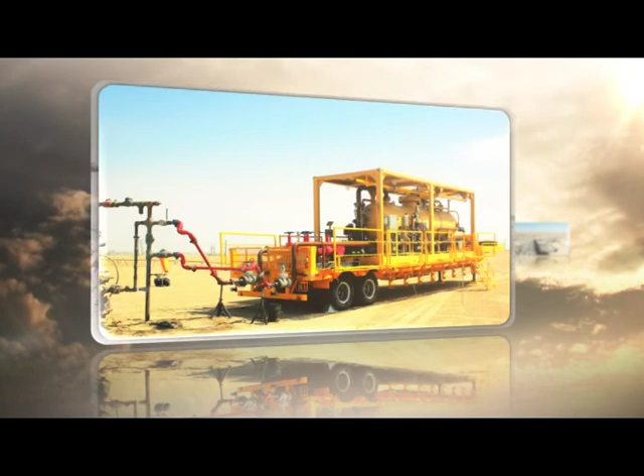HBP, the oil equipment brand from China.

The historic pictures recorded the innovative development of HBP in the past 10 years.

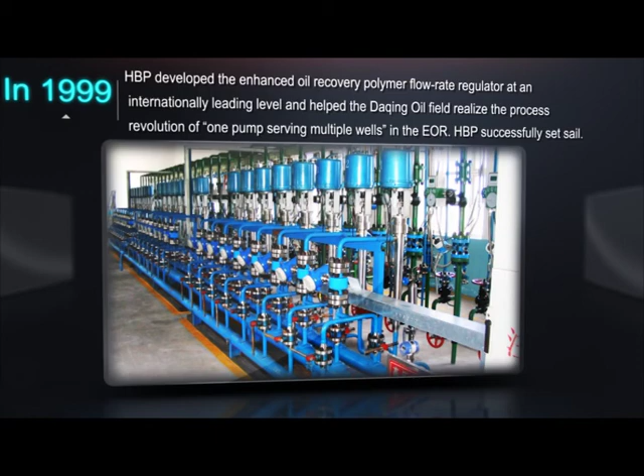In 1999, HBP developed the Enhanced Oil Recovery Polymer Flow Rate Regulator at an international leading level and helped the Daqing oil field realize the process revolution of one pump serving multiple wells in the EOR. HBP successfully set sail.

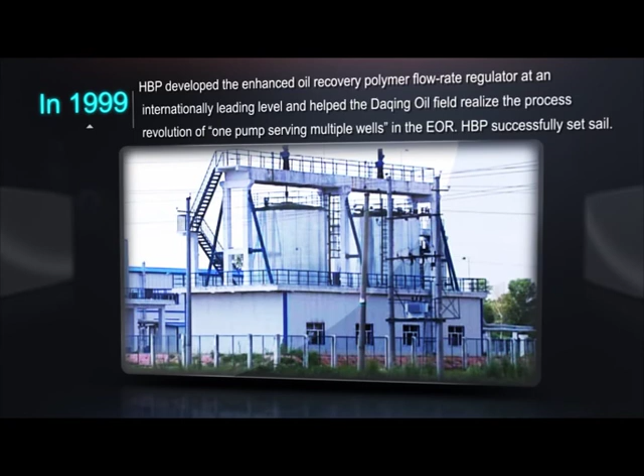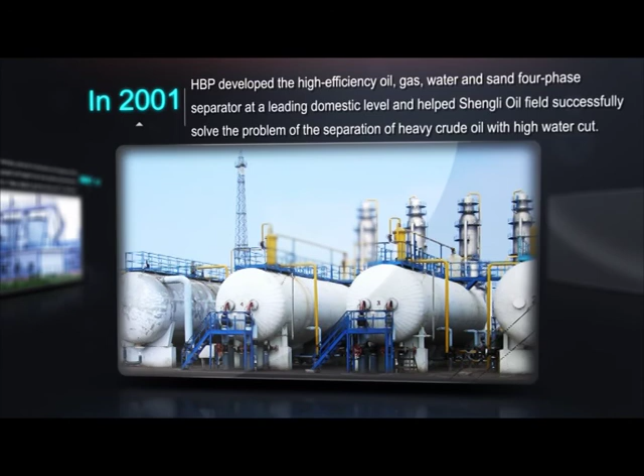In 2001, HBP developed the high-efficiency oil, gas, water and sand four-phase separator at a leading domestic level and helped Shengli oil fields successfully solve the problem of the separation of heavy crude oil with high water cut.

In 2003, the HBP oil and gas processing equipment successfully entered the offshore oil market, providing complete sets of equipment for the offshore platforms, FPSO, and the onshore terminals. The company became the core supplier of Chinese offshore oil equipment.

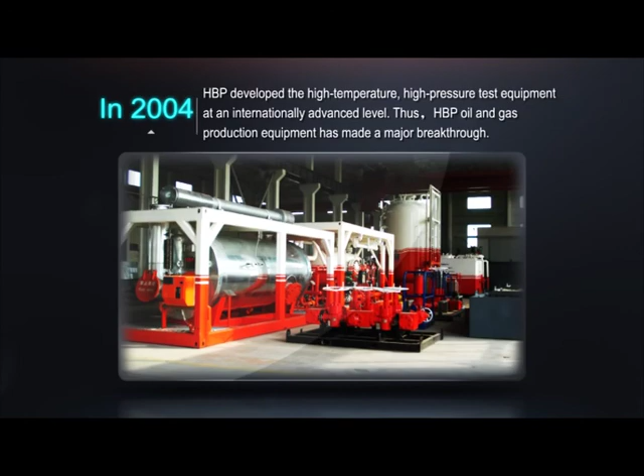In 2004, HBP developed the high-temperature, high-pressure test equipment at an internationally advanced level. Thus, HBP oil and gas production equipment had made a major breakthrough.

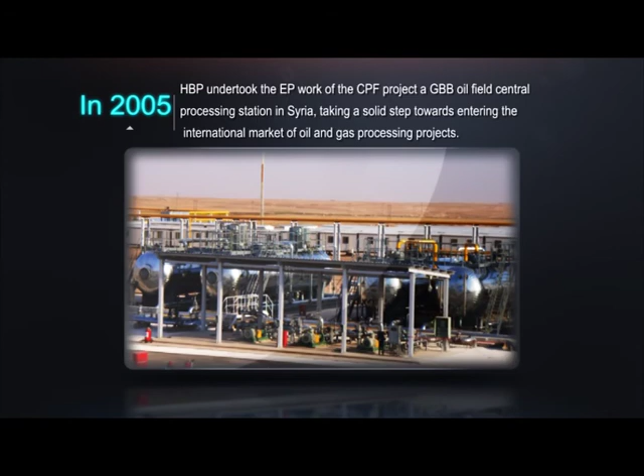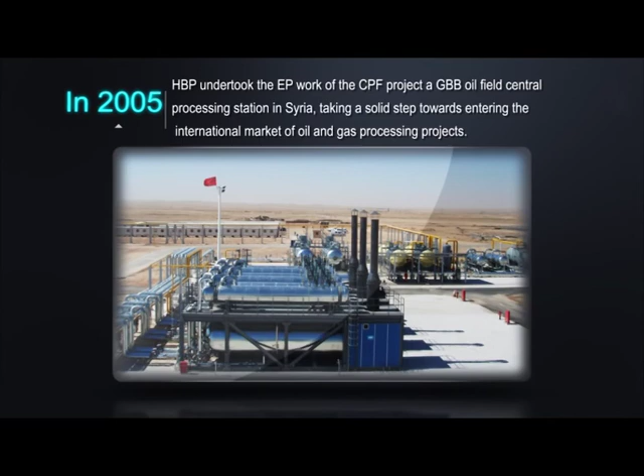In 2005, HBP undertook the EP work of the CPF project at GBB Oilfield Central Processing Station in Syria, taking a solid step towards entering the international market of oil and gas processing projects.

In 2006, HBP undertook the 4-gas lift gas processing project in Janajol Oilfield, Kazakhstan, completing industrial chain extension of HBP oil and gas processing technology.

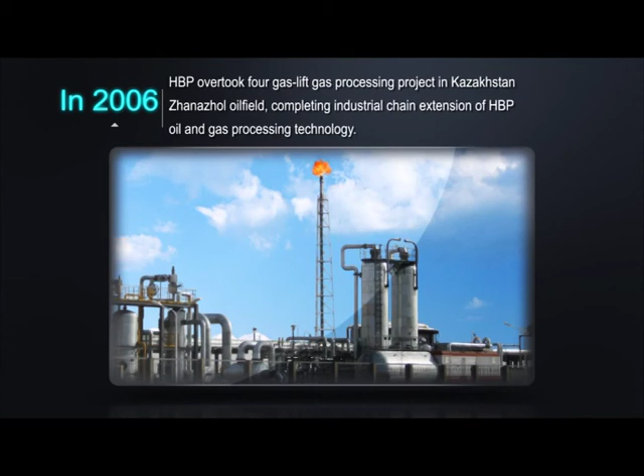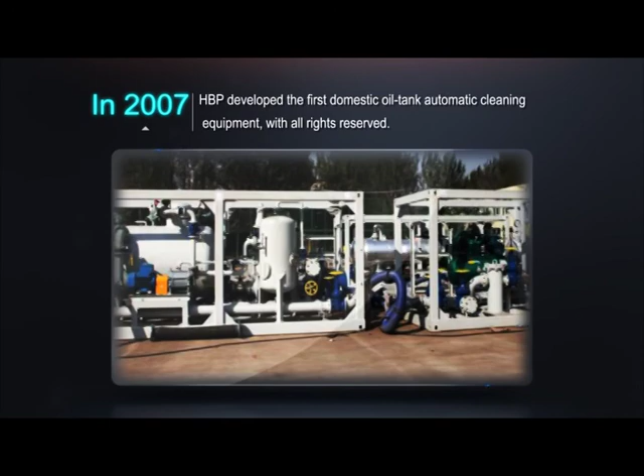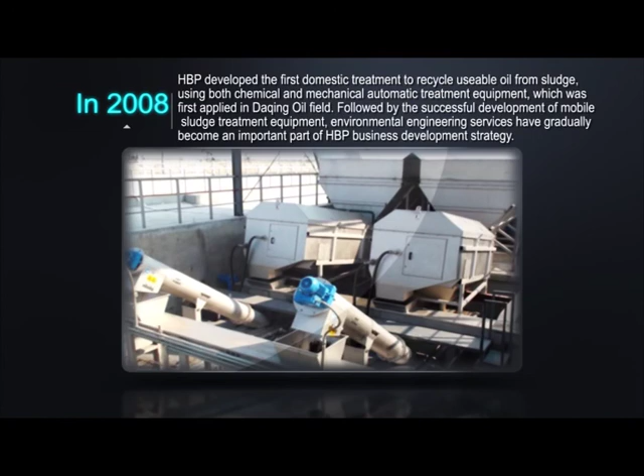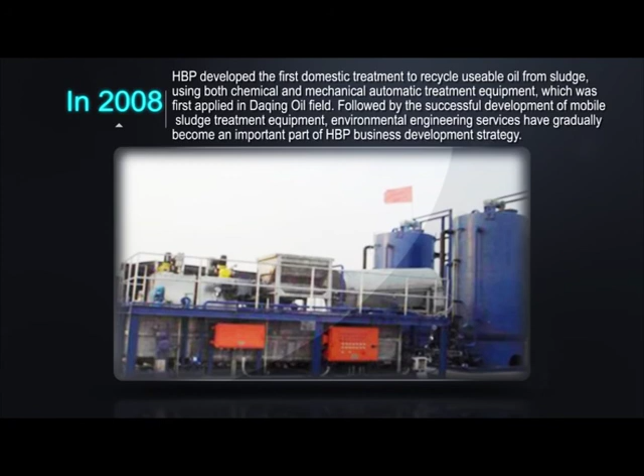In 2008, HBP developed the first domestic treatment to recycle usable oil from sludge, using both chemical and mechanical automatic treatment equipment, which was first applied in Daqing oilfield. Following the successful development of mobile sludge treatment equipment, environmental engineering services have gradually become an important part of HBP business development strategy.

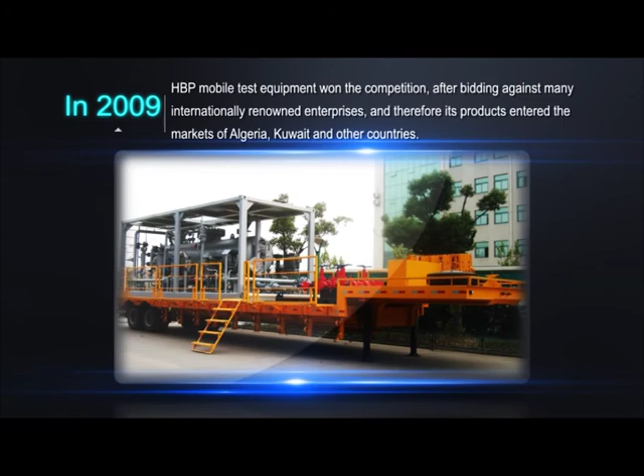In 2009, HBP mobile test equipment won the competition after bidding against many internationally renowned enterprises, and therefore its products entered the markets of Algeria, Kuwait and other countries.

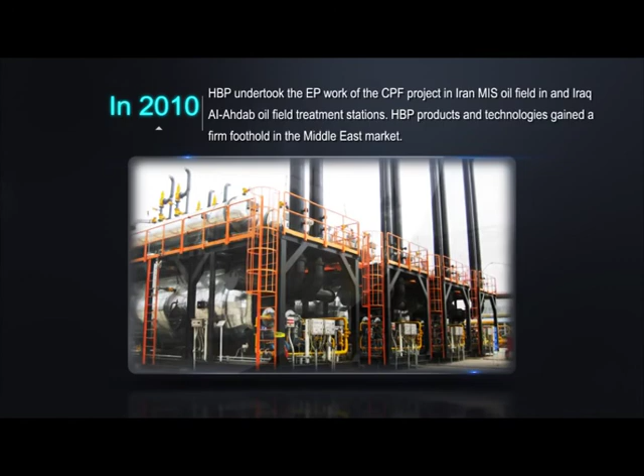In 2010, HBP undertook the EP work of the CPF projects in MIS Oilfield, Iran and Ahdab Oilfield Treatment Stations, Iraq. HBP products and technologies gained a firm foothold in the Middle East market.

In 2011, the Oil and Gas Development Incorporation entered the energy development field. The energy development strategy of HBP has officially started. It is the strong ideals and great ambition of HBP and its supporters that have made the achievements and advancements over the past 10 years possible.

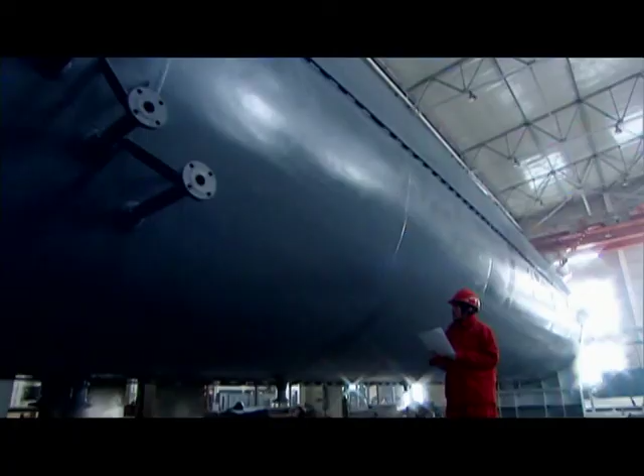China Oil HBP Science and Technology Corporation is a high-tech enterprise dedicated to providing the global oil industry with an efficient, clean mode of oil and gas resource production.

On February the 25th, 2011, HBP went public in the Shenzhen Stock Exchange and became the first Chinese technology and equipment solution provider in the petroleum and petrochemical field that entered the A-share market.

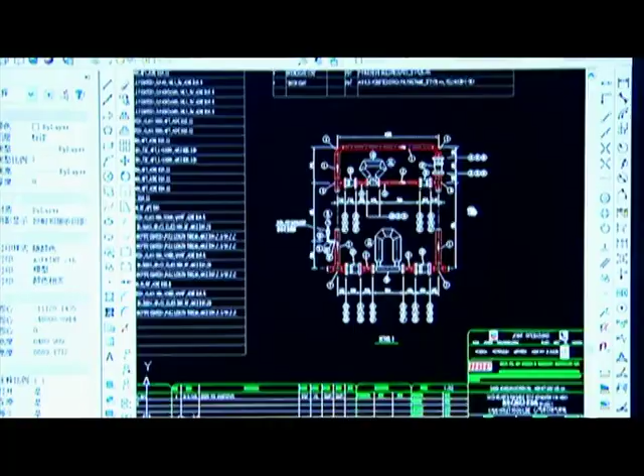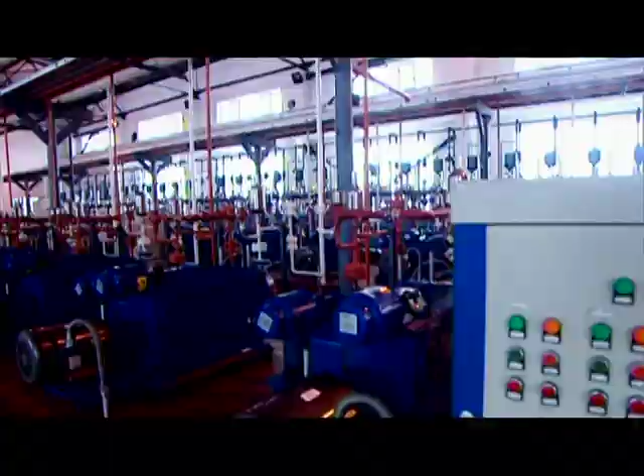The company always follows the core ideology of continuous innovative technology development and the importance of being people-oriented. After more than 10 years of development, the company has become the top provider of the design, development, production, marketing and service for new technologies and products, as well as implementing industrial automation systems integrating into China's oil industry.

HBP business scope covers oil and gas treatment, oil and gas extraction, oilfield protection, oilfield engineering technology, oil and gas resources development, and a variety of other such fields.

Establishing itself as a provider of integrated high-efficiency, energy-saving and environmentally friendly solutions and complete set equipment for the oil industry corporations, HBP regards technology innovation as a means of maintaining sustainable development.

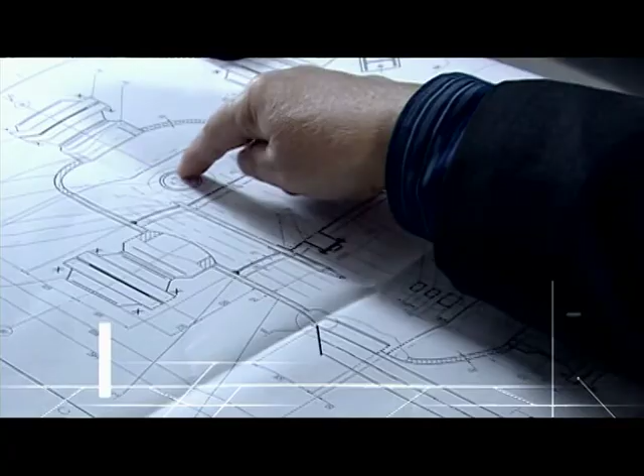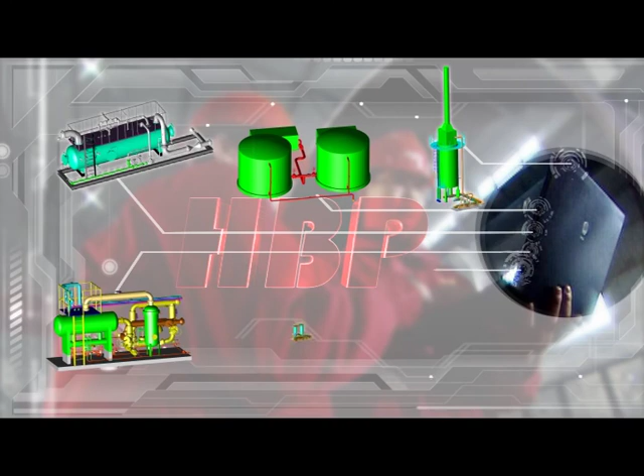During many years of experience in the industry, the company has continuously expanded its product fields. Based on the market requirements, the company is not only concentrating on the development of new technologies, but also optimizing various equipment and technology so as to utilize the advance of systems integration and therefore meet the requirements of different fields and design a complete system of equipment.

Examples of HBP's core system of technology include both onshore and offshore high-efficiency oil and gas treatment equipment, skid and trailer-mounted high-temperature and high-pressure test equipment, fixed as well as mobile oil waste treatment equipment, and automatic mechanical oil tank cleaning equipment. These products, developed independently by the company, have reached a leading international level.

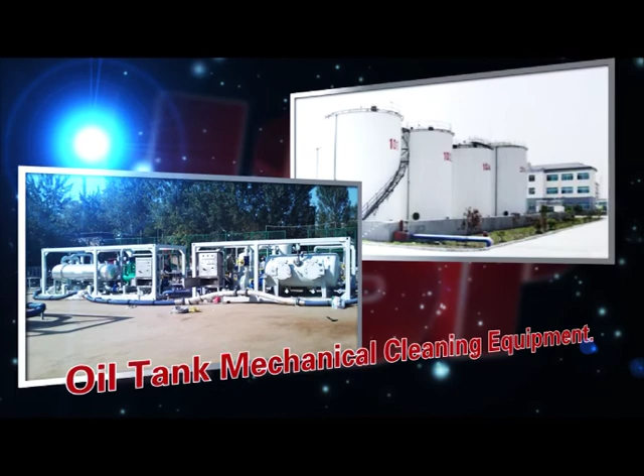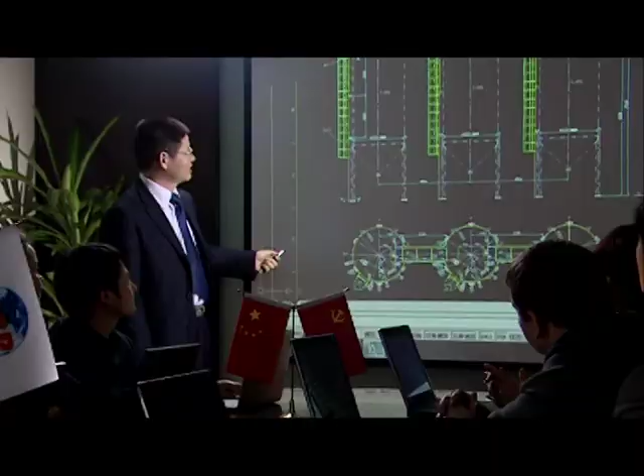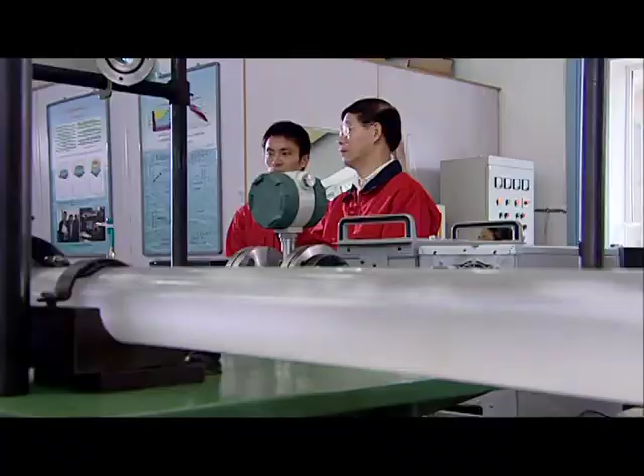Holding the work philosophy of equality, mutual trust and progress in high esteem, HBP has employed plenty of talents. Now it has a fully equipped professional R&D design team of more than 200 people, comprised of doctors, masters and senior engineers. The R&D decision-making team, composed of many Chinese Academy of Engineering specialists, chief scientists of the Chinese Academy of Sciences, and national design masters, ensures the leading position of HBP's technical level in the industry.

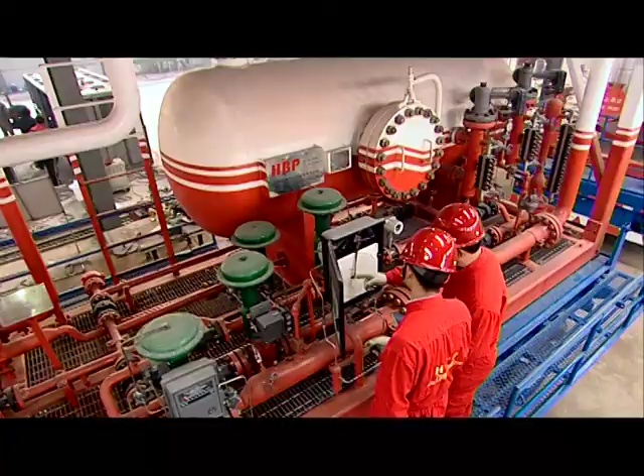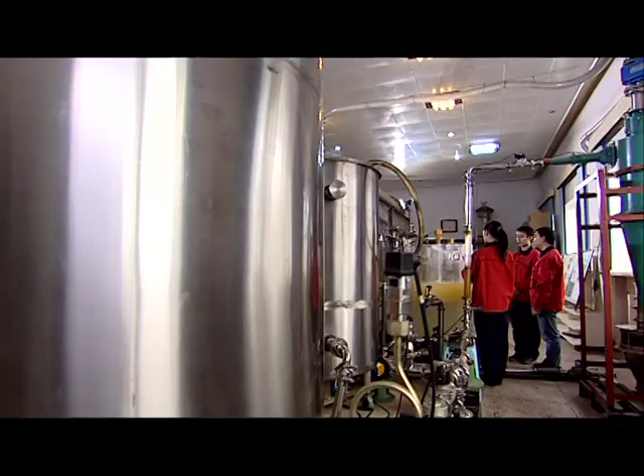HBP has undertaken and participated in research work for major projects of the 12th National 5-Year Plan, major environmental scientific projects, and a number of national research projects. The company has also established strategic cooperative relations and carried out a series of innovative and promising project research with the Chinese Academy of Sciences, China University of Petroleum, and other well-known domestic and foreign research institutes.

HBP now has 8 invention patents and patent application rights, 27 newly incorporated patents, 13 software copyrights, and over 40 self-developed techniques, all of which serve to form our complete core system of technology.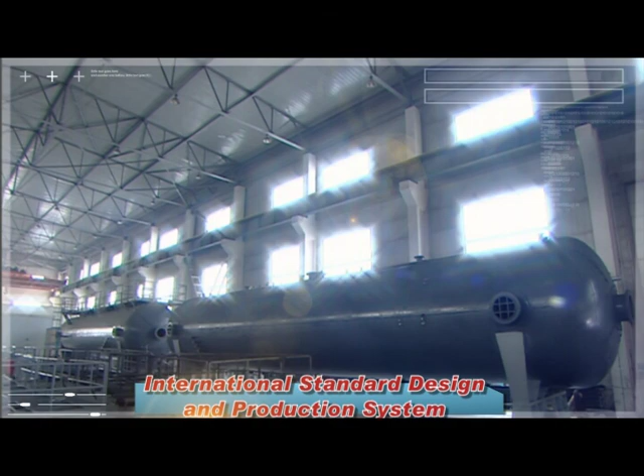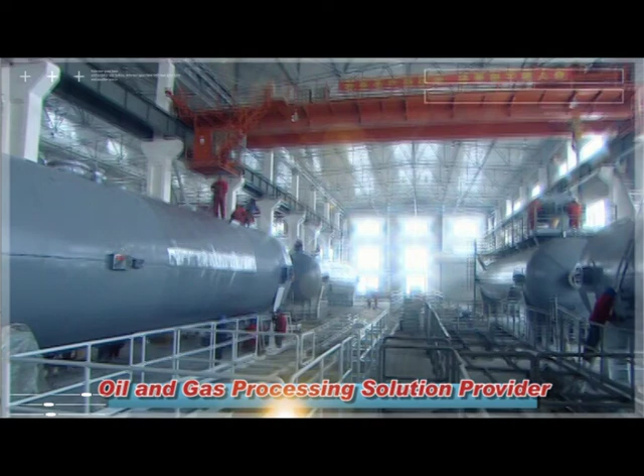Meanwhile, HBP has designed a comprehensive, internationally standardized design and production system, being one of the few domestic providers of oil and gas field process systems and equipment with integrated design and manufacturing ability. Currently, HBP holds a general contracting qualification for engineering design, pressure vessels, pressure piping design, manufacturing quality, and electrical engineering contracting construction. The company has also passed API, ASME U2S, NBR certification, as well as ISO 9001, ISO 14001, OHSAS 18001, and API Q1 Quality System certification.

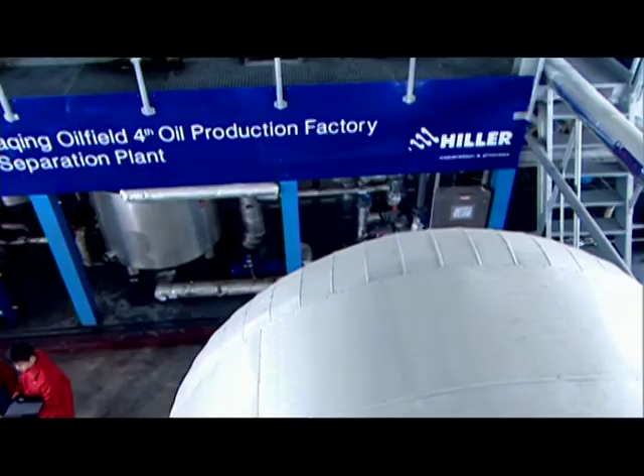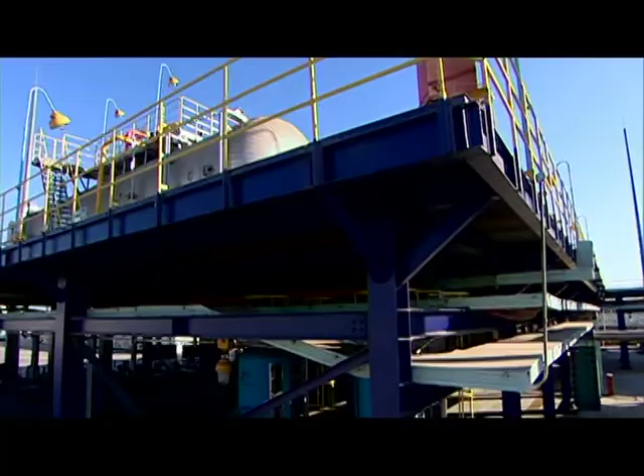After more than 10 years of tenacious efforts, HBP has emphasized the enterprise development philosophy of creating value for customers, and dedicated itself to providing optimum products and service for the oil industry all around the world. It has successfully established its brand image as a top provider of sophisticated technology in general process system solutions and complete equipment.

Its service has covered the 3 largest domestic oil companies and their subsidiaries. Now HBP has become the technological leader in China's oil and gas treatment field.

HBP has always emphasized the importance of an internationalized development strategy and the continuous expansion of the international market. So far, it has provided complete sets of oil and gas treatment and extraction equipment for a myriad of development projects in oil and gas fields. Its business relations have expanded to include 20 countries and regions around the world.

In Syria, Ecuador, Sudan, Algeria, Kazakhstan, Iran, Iraq, Kuwait, and other countries, this energy service brand from China has become a fine figure on the international stage of oil equipment development.

President Huang stated: 'The 11 years of development of HBP sufficiently prove that only when we choose the way of technology innovation can we meet the market requirements. It is the people behind HBP whose goal is to establish the high-tech brand of HBP in the industry. We are determined to prove to the world that we, the Chinese people, can also create original ideas for high-tech complete equipment with our own patents. Yes, we can. I believe.'

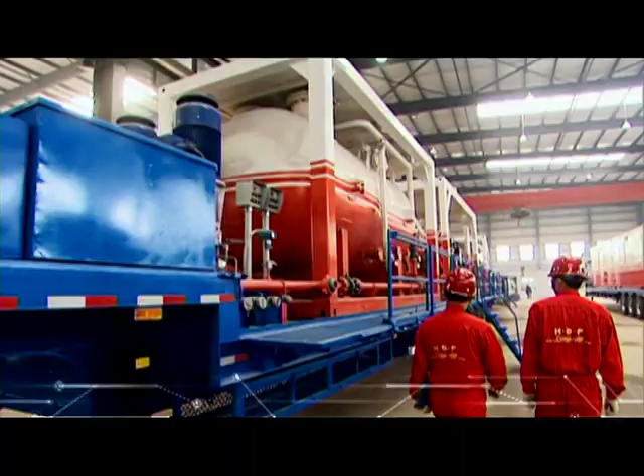On the stage of the oil economy, Chinese enterprises have the means to keep stride and compete with the rest of the world, to welcome the challenge of world market competition. With mutual cooperation, HBP's personnel will make progress and create China's oil technology brand with formidable international influence, as well as achieve China's goal of playing a greater role in the world market. With our unlimited wisdom, strength, and determination, we are looking forward to a bright future.

China Oil HBP Science and Technology Corporation Limited.